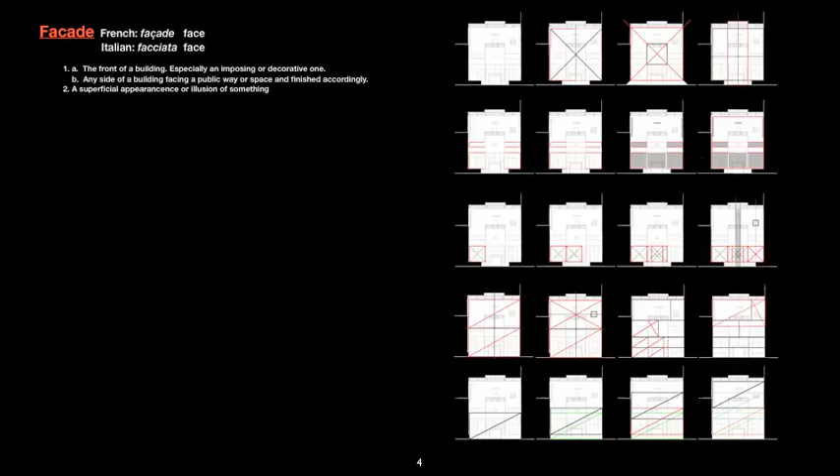Like the face, our traditional understanding of facade is understood as a series of variations within a set of normative strategies. These controlled strategies, when encountered within a familiar range, define our expectations and dictate how we experience architecture.

Our understanding, or reading, of facade is connected through history regardless of technology or style. Even though projects may vary greatly, based on our collective understanding of these norms, we may negotiate variations in the experience of architecture.

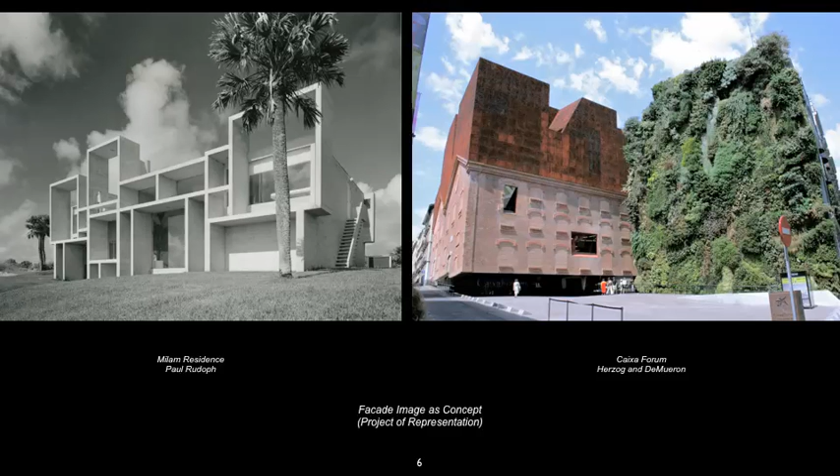In the book Surface Architecture, Leatherbarrow and Mostafavi outline two primary ways of understanding building image, the first of which is the project of representation. The building image is developed through concept regardless of the types of construction. The final building image is the primary concern and may often be at odds with normative construction tectonics.

The second of these ideas is the development of building image by the application of the methods of production. The final building image is read as the application of rational tectonics of construction and has its roots in a vernacular way of thinking.

The project of representation is absent.

The monumental architecture of the Egyptians and Greeks represents a refinement of the technology of the trabeated system. The building image is developed through a direct expression of structure, either by reading the wall as mass or by the implication of surface by structure. It is limited by its means of construction.

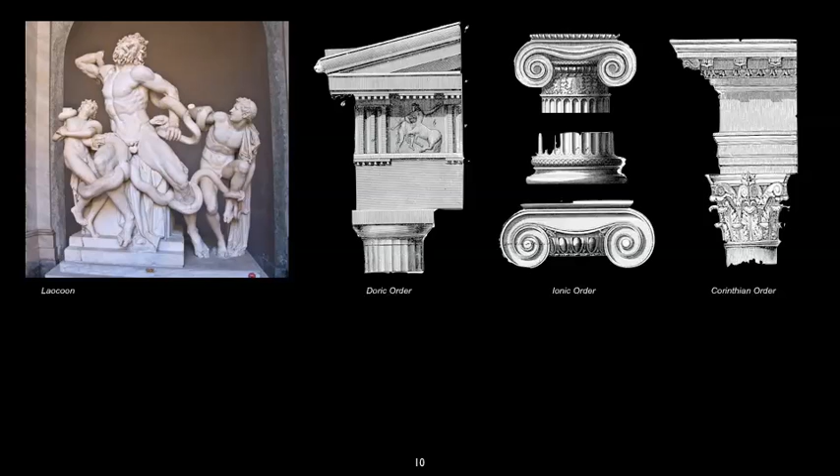The Romans provide the first major material advancement with the introduction of concrete coupled with fired brick. This allowed for the development of the arcuated system and shows a direct relationship between structure and surface. The Romans also adapted the Greek orders as applied ornamentation.

In Thomas Schumacher's The Skull and the Mask, he points out the atectonic contrast between structure and surface, whereby the applied ornamentation of the post and lintel system spans a greater distance than the structural bay of the arch.

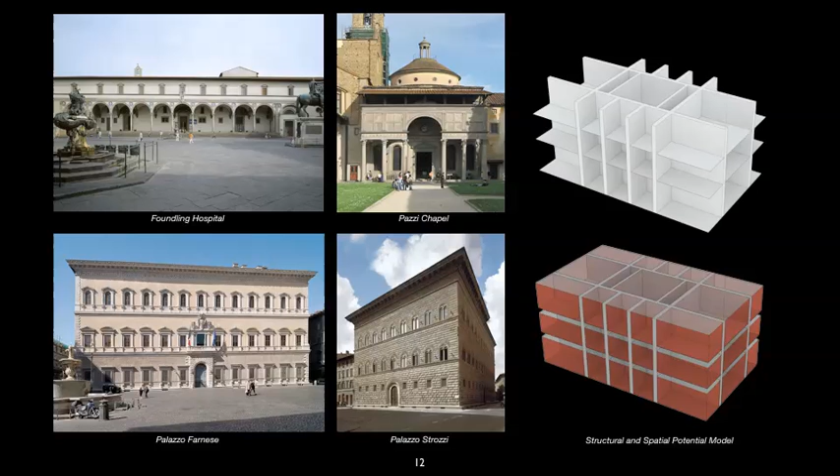Building technology, with a few notable exceptions, remains essentially unchanged for the ensuing centuries. One of those exceptions is the Gothic period, which is seen as a refinement of stacked stone technology.

During the Renaissance, the rediscovery of ancient technologies and modes of thought brought about a shift from a building image derived from technology of construction to pure representation. The building image is still limited by stacked stone technology and therefore has a limited spatial potential.